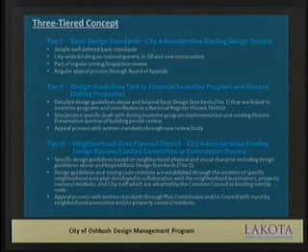And then we had the third tier, which was sort of a neighborhood area plan district. Like most of you are familiar with what a planned development is, it would fit right over a certain area, and then you would have those design standards just for that area. On an area-by-area basis, Plan Commission and Council would be the review bodies for that.

So what we're coming with today is basically Tier 2 has been removed from the proposal, and we're doing a universal design standard, and it's not called Tier 1 or Tier 3 - I just put them on there because I took off the middle one. So it has the simple, well-defined basic standards. It's citywide for single and two-family homes. It'd be adopted as part of the zoning ordinance, just built right in, administered through regular process and appeal process through the Board of Appeals.

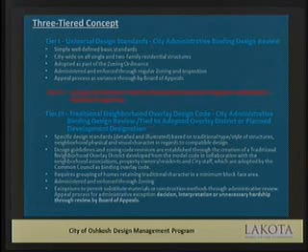And the second tier, the other one would be a neighborhood overlay, traditional neighborhood overlay design code. That would have the specific design standards, illustrated and detailed, based on the style or type of structures, the physical and visual character of the neighborhood. The design guidelines and the code revisions would be established through the creation of an overlay district, so you'd put it over the top of the regular zoning.

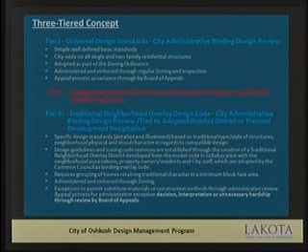Alternatively, you could do a planned development and kind of augment this model overlay code that we're going to go through. But it would require a grouping of homes that retain traditional character at a minimum of a block face, intersecting street to intersecting street. So you're trying to keep that character of the block. It's pointless to have the overlay over 1 or 2 properties where the rest of them don't have it, because you're not maintaining that rhythm of the street, of the neighborhood.

It'd be administered and enforced through zoning. Exceptions for materials and some construction methods would go through an administrative review. Any challenges to that, you'd go through the Board of Appeals. So I'm going to get into the universal design standards, and then Nick is going to go over the overlay, traditional overlay, neighborhood overlay design standards.

So again, these are going to be universal. They're going to apply to all single and two-family homes, and that doesn't matter if you have 4 people renting 1 room in each thing. If it was designed as a single or a two-family home, it would apply. Again, these are very basic, very simple, but it's going to deal with existing buildings, windows and doors, decks and patios, any additions or major changes, and major changes are defined as a 50% change to a facade.

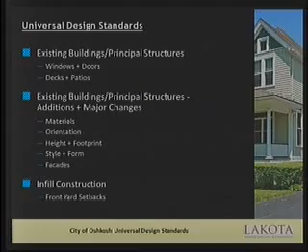An addition is obviously any bigger footprint or elevation change. We'll talk about materials, orientation, the height and footprint, style and form, facades, and then basically the front yard setbacks for infill construction - so when you have an empty lot in an already established neighborhood where you can set that home.

So windows and doors - basically there's three items in the overlay. Windows and doors that are fronting or visible from a street could not be removed by closure or filling.

Just some of the pictures I threw on here. Here's a long-term filled door - it's permanent, so they just basically filled this door off. You can see the shrubbery growing up above it. Not real nice. The rest of the building doesn't necessarily look too bad, could use some paint. Here you can see a lot of closure of windows. This one as well, there's a lot of closure of windows.

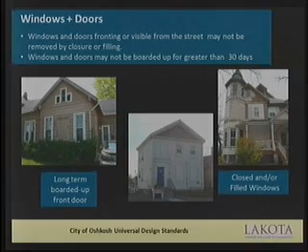You probably heard a lot of things saying, well, is that a maintenance issue? It is not - this meets building code. I mean, they're legally closed off, they're sided, but the character of this house no longer exists. So universally, we're recommending not to allow the windows to be closed off or the doors to be closed off permanently. Obviously, you could board them up for security or weather protection for a short period of time while doing rehab or repairs.

And decks and patios are now going to be limited to a rear or side facade of a building. If you're a double-fronted lot, a through lot, at that point you don't have a rear of the building, so there are exceptions built in for that. But you can kind of see what decks look like on the front of buildings.

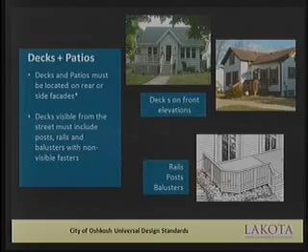And then also decks that are visible from the street, even if they're on the sides, would have to include posts, rails, balusters, and the fasteners being non-visible - trying to give a little bit higher quality to a deck on a home.

If you're doing a major change or an addition to the building, the material and color would have to be complementary and tie into the original building. There's just some examples here.

All the color matches, but you can see it's materials that are drastically different. This building has about 6 different building materials on it. Colors may not be super far off, but the materials themselves, if you were out there in person, it looks much worse than the visual image.

This structure looks pretty nice, but the addition itself is vastly different color, different materials. And when you walk down the street and see it, it just does not look like one building - it looks like 2 of them that got pushed together.

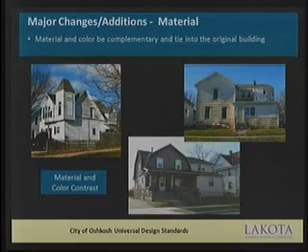For orientation, footprint, and height, basically we're saying that additions should be placed on the rear or side of the building, not on the front of a single or two-family home, with the exception that if it's architecturally compatible, and you can prove that, show it in your plans, you could build it onto the front. Also, that addition shouldn't be 50% bigger than the existing building footprint. You shouldn't over or dominate the existing home with your addition.

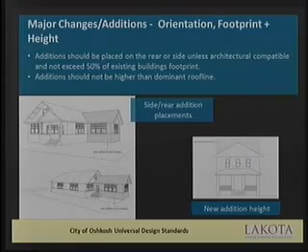And then additions should not be higher than the dominant roof line, and you can kind of see what a dominant roof line would be. These images just basically show an addition on the rear or the side. If you can imagine it on the front, it doesn't look that great.

Talking about facades, basically any facade facing a street, we're now saying that it must have at least 25% area devoted to windows and door openings. What we get a lot of, and it's kind of hard to see, basically like this wall plane here, they just closed it off. Sometimes they'll close it off for a number of reasons - they don't want to pay for windows, they're changing the interior in some way, but that's not a very good look for a street facade.

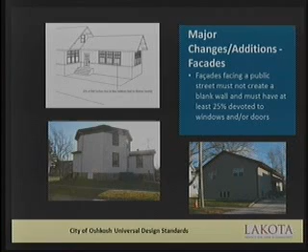This one, again, is hard to see. This image - Nick is going to go into it a little bit more detail with the overlay - this area here is about a 25% fenestration in that wall with windows.

And then the last one was just infill construction, which was the front setback, and it's basically lining up the structure onto the street. This one's not that great of an example, but you can see most of the homes are pulled back - this one's probably about 20 feet back from the rest of the homes in the block. So as you're going down, all of a sudden you see a big void, and if it happens too much, you end up with what I call like a sawtooth street face.

This is even a different example because it has the garage out in front, so the additional garage was out front. But that's the basis and the basics for universal standard. Once again, it applies universally for all homes, single and two families in the city.

So we didn't get into a lot of detail on any kind of traditional style. If you're a Queen Anne, you have a distinct style of a home that is probably not going to apply to a 60s ranch or 70s ranch.

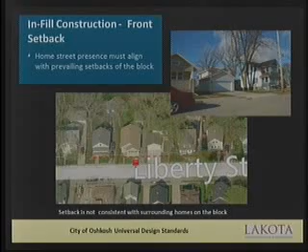So these were very, very basic, designed to stop some of the worst things that we've seen happening. And David hit some of the basic concepts, but in your handout, we get into more specific ordinance provisions for both the universal and the overlay. So yep, David's going over a longer ordinance in a brief time. For the sake of time, it is very abridged, but trying to hit the highlights of what's on there.

And with that, I'm going to turn it over to Nick to go over the overlay code.

This is forward, this is back. This is the plan. There's a trigger on the bottom. And also, I wanted to mention that if you want to make any comments or anything, raise your hand, let me know. We have to take the mic around because of the style of the room. It is televised, so there you go.

Thanks, David. My name's Nick Kalogeresis. I'm with the Lakota Group. I'm the person with the long last Irish name. Thanks for having me back here again.

As David said, I'll be going over the overlay code. You have a copy of that. My presentation is really going to give an overview of the code. I'm not going to get into every sentence of the code, but give you the highlights and explain why we came up with some of the provisions as we did.

First, we wanted to at least explain what the overall objectives are, and I think we discussed these almost a year ago today. Obviously, the main point of this overlay code is to promote better design character of our neighborhoods and to maintain that character and to guide good design. So that's an important part.

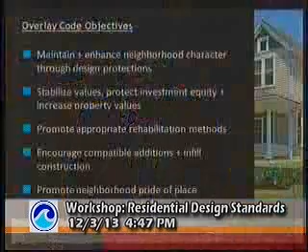The other aspect is obviously protecting property values, protecting equity that's already there for people who have already invested in their properties, and to stabilize and increase property values in places that may adopt this overlay code.

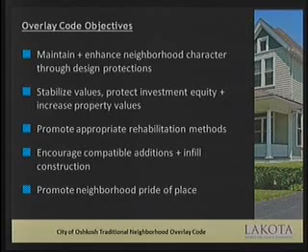The other thing that we want to promote is good rehabilitation methods. So some of the things that we explain in the code are really good, proper—I wouldn't say preservation techniques, but good rehabilitation techniques for traditional neighborhoods. And we want to encourage good infill design as much as we can and good additions, and obviously promote pride of place in neighborhoods that may adopt this code.

Oops, I pressed the wrong button. Let's see. There we go. All right.

The code, I know it's a little long, but basically we address three major parts. One is existing buildings, and we're really focusing on just a few things, mainly windows and doors and porches, obviously being a major element of traditional homes. So that's an important thing. We're also addressing patios and terraces and things like that. But when it comes to existing buildings, that's really all we're focusing on.

Additions and major changes—we're really focusing on where it's placed, its orientation, materials, fenestration, windows, things like that, a little bit of style. And with infill construction, we're focused on very much the same thing, although we've added driveways and ramps to that as well for new construction.

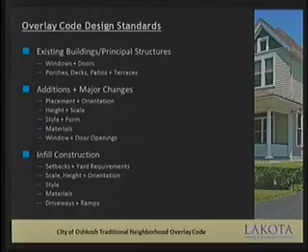So, overlay common elements. Ooh, what happened? Oh, there it is. Okay. As we go through this, the basic elements of the code are these that we have above here.

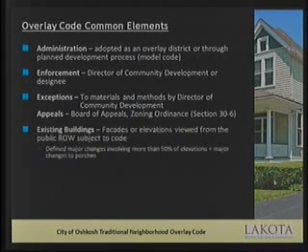One is, administratively, it can be adopted, as David said, as an overlay to an existing neighborhood on top of the existing zoning. Or secondly, alternatively, it could be adopted as part of a planned development process, and the code would serve as a model code, and you could actually add to that or modify it if we go through that process. There's two basic ways to administer it.

Enforcement obviously would be the Director of Community Development or the designee, so it would be in the Planning Department where it would be enforced. There are exceptions that could be made to this code for an applicant who wants to use a certain material, and that material is appropriate to the style of the house—an exception can be made for those instances.

And if there's an applicant who is not happy with an administrative decision, they can appeal that to the Board of Appeals. So we do have that appeal process in place for this code.

Now, the three major things here: for existing buildings, we're only looking at things viewable from the right-of-way. That's mainly the front facade, and parts of the side elevation that are also viewed from the sidewalk. So that's all we're looking at.

This code only kicks in if a project comes forward that's going to change more than 50% of the front facade or the side elevations. That's when the code kicks in. So the question for all of you is, is that acceptable?

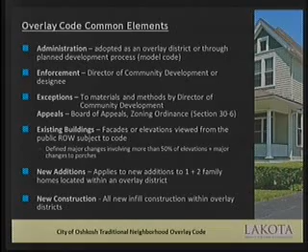I'm not going to talk too long about materials, but throughout the whole code, as you've probably read, we really stress maintaining existing materials—try to preserve them, maintain them, repair existing materials as much as possible. Throughout the overlay code, you're going to read that as a primary emphasis.

But if original materials can't be maintained, then replacement is allowed. We allow a whole range of alternative materials, both natural and synthetic, to be used in the overlay district.

Pressure-treated woods requiring painting, staining, and wrapping are also included. A major emphasis on replacement is that if you're going to replace materials such as a casing around the window, it should match the width of the original material, or the profiling and detailing, as much as possible.

New materials should be appropriate to a certain design style if it's new construction. So if it's a Queen Anne house, usually a sided house, a new infill house would be a neo Queen Anne and should have siding as its primary material. Materials should also match color as appropriate to the house, and materials can be removed temporarily to undertake a rehabilitation project.

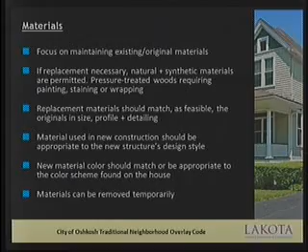That's really the whole emphasis about materials throughout the overlay code. Question? Yes, I don't know if...

This is appropriate, but when you're looking at materials, have we considered doing anything with lead and asbestos abatement if a project is commenced? Would this be the appropriate time to put that in? That's a good question—I don't know if you have a suggestion on that.

You're really looking at the overlay here, so if we would be doing something, I think we'd want to look at that as a universal standard versus just an overlay, because why would we apply that environmental standard just to a select group of homes when it may be a citywide concern? So I think we have to look at it differently than just part of the overlay.

I wouldn't challenge that, but I'd like to say that a lot of this is looking at stabilizing and improving older areas of the community that would be most affected, and I'd at least like it considered to put that standard in—something to the effect that any alterations or any construction, regardless of the percentage, part of the program is lead and asbestos abatement, for any project. That's correct.

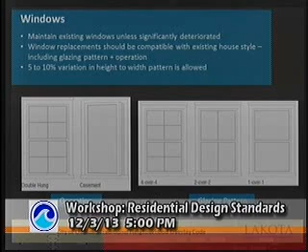Under existing buildings, we're looking at windows, doors, and porches primarily. For windows, we're trying to encourage rehabilitation of the existing windows as much as possible, placing storm windows when more feasible. Only if a window is significantly deteriorated, with rot or missing pieces, would window replacement be considered. One of the things we're primarily looking at is making sure the window operates the same way - so if there's a double hung window that needs replacing, it needs to be a double hung window in kind, maintaining the same glazing pattern, like 4/4 or 2/2.

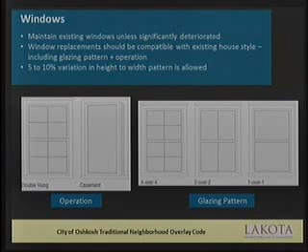If there needs to be a change for window replacements, we are allowing a 5 to 10% variation from the height to width pattern. So we're allowing a little bit of change - if somebody wants to replace a set of windows and wants a wider or smaller window opening, we can allow that variation.

In terms of window casings, for many traditional homes, this is an important feature, especially around windows. A lot of Queen Anne's have trim work around the perimeter of the house as band boards. So they're very character-defining features.

Under this code, we are encouraging property owners to maintain the original casing, repair them as much as possible, repaint and reinstall them. But if they're severely deteriorated or missing, replace them in kind with similar or synthetic materials as much as possible, maintaining the width of the original materials.

This is an existing window with original trim. This is a window that's actually been replaced, with replacement trim around it. You can find replacement parts fairly easily, so we want to maintain that feature. Trim also has a good functional characteristic in protecting windows from being infiltrated by water.

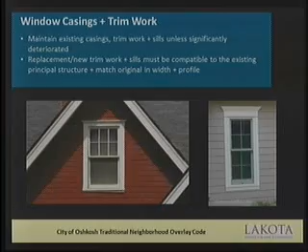Windows and doors, as mentioned earlier under the universal code, the same applies in the overlay code: original door openings should not be replaced or enclosed, they need to be maintained. We are allowing that if a property owner wants to install a secondary entrance viewable from the public right-of-way, they can install it off to the side, especially if they're going to use the back part of a porch as an entrance. We are also allowing temporary door closures if there's building remodeling or a project happening, so it can be temporarily enclosed.

And again, same with everything, we are maintaining. Part of the code says you can't remove existing windows, you have to replace them the way they are.

Well, many of these houses weren't built with conservation in mind. I'm wondering what would be the problem if that top window was a window to the attic, and the middle windows on the side—in order to make this a more efficient house, he took out the middle window and ran the siding with the same material. What would be wrong with that? I'm looking at, you want people to revitalize the houses, and part of revitalizing is also to make it more insulated, better equipped to lower energy costs. So I'm not sure why we wouldn't allow some of those things to happen, or can they do that through the appeal process?

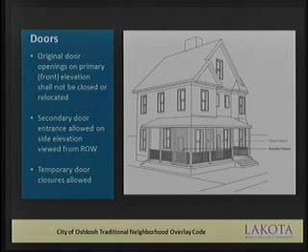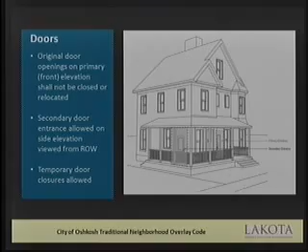We are forbidding it. To answer your question, the issue with removing windows from the facades of the house—this applies to the front facades and facades visible from the street, so we don't hit the back or rear of the building. It's really trying to keep that neighborhood character. Once you start changing the distinctive features on your pre-50s homes—there's 20 different styles, Queen Anne's, bungalows, craftsman's, four squares, tons of them. Their big defining features are their windows, door openings, and porches.

When you start closing them off for whatever purpose—efficiency, not wanting a window in that room, or a dog that's too tall and jumps on the window—when you start changing those over time, that house loses its traditional character. Again, this is only for traditional neighborhood overlay areas. And that's the best way I can answer your question, is that as you start doing those things, you do start removing the character of the building.

And a good example with that is, you just not putting the trim on and putting in solid windows that don't open. The house isn't going to look the same. Now, for the goal of energy efficiency, it might be in there.

Windows themselves, even these old windows—in my opinion, especially these old windows—can be rehabbed and be very, very solid. You just have to actually do the work. The other thing, too, with some of these houses, is that the modern practice of air-tighting everything in old houses is going to be a mold issue. The houses are supposed to breathe.

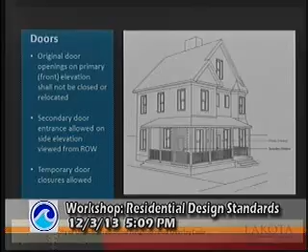With these overlay standards will be an appendix - a design guideline book of housing styles pre-1950. You go pre-1940s, some are built in the 50s but not as many. They're actual styles of houses. When you get pre-1920 they become more vernacular, but they're still styled houses - they have character to them, they have elements that are features of those homes, and those things will be reviewed when we look at that. So if the window had been changed out at one point and you're going back to do a major facade change, you would go back to the traditional house style, not to what has happened over time. This is a code trying to preserve the traditional character of the home and the neighborhood - that's what it's for, to keep that traditional character of the neighborhood.

Any other questions? So we're going to keep going - I'm sure you'll have more.

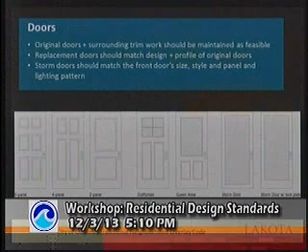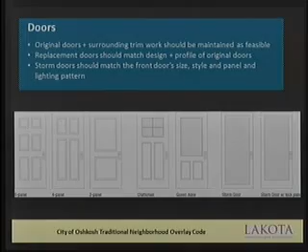In terms of doors, what we have here and what you've seen in the code are just typical doors for traditional homes - doors with a mixture of raised paneling and glazing, which is what we're trying to encourage. So typical panel doors: 4-panel, 6-panel, and combination. And here are our storm doors - one thing we want to encourage is storm doors that are fully glazed, so you can see the original door through the storm door. That's something we want to encourage, also storm doors with kick plates in them. These are just some of the samples we want to try to encourage.

Porches are one of the major things we're looking at in the code. We're stressing preserving as much of the original material as possible, from major elements like foundation piers to the steps, to the skirting, to the roof and columns. If some things need to be replaced, they can be replaced in kind with both natural and synthetic materials, complementary to the house's original design.

So for a Queen Anne house, we definitely would like to see a Queen Anne porch. This code would only apply to those applicants seeking to replace their porch or undertake any major changes to it. So we want to try to be compatible with the existing house.

Treated lumber can be used as a material as long as it's either wrapped or painted. That's one of the things we're trying to encourage.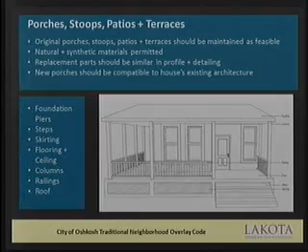One of the things we want to address is porch enclosures. That was a major issue that came up through this process. We want to encourage people to maintain the original porch as much as possible, to maintain 100% transparency. Originally, all porches were open. Sometimes during the 1920s and 30s, they began to be enclosed, but often with fully transparent windows. So we're trying to avoid things like this from happening in the neighborhood.

We are allowing some enclosure to take place, and the major thing is we're allowing up to 40% enclosure in the neighborhood. So this is about 60% right here. What we're trying to avoid is something like this, where we lose a lot of the porch—this is like 30%. We want to maintain some transparency of the porch and the overall neighborhood's porch appearance.

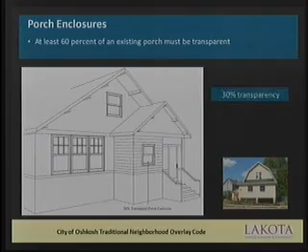All right, let's keep going. Oops, went too fast here.

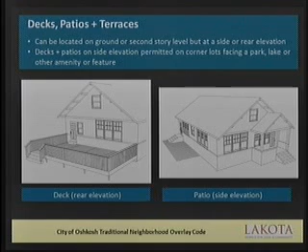This is pretty straightforward: decks and patios being placed on the side or the rear elevation. We should try to encourage new decks to at least fit in with the existing house, with railings appropriate to the existing style.

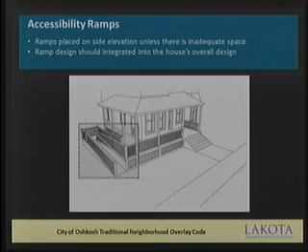In terms of additions and major changes, we want to address where the addition happens and how it looks on the overall house—its height and scale, overall materials, windows and door openings. Additions should be compatible with the existing style of the house.

Additions, especially on the rear or side of the house, should not be higher than the ridge line of the existing house. We're trying to make sure the addition fits with the scale of the existing house and doesn't overpower it—it should remain behind that dominant ridge line. That's one of the major features.

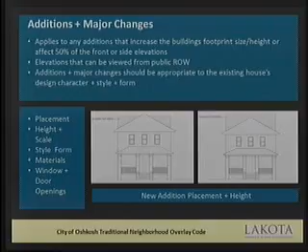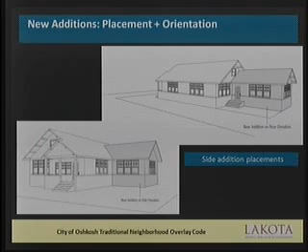As already shown, in terms of placement, additions should take place in the rear of the house, whether behind the house or on the side. That's where we'd like to see additions take place overall.

The overlay code also requires that at least 25% of an addition facing a right-of-way must be transparent or glazed. That's what we're looking at to try to avoid certain appearances from the street. Windows should generally follow a height-to-width ratio of 2 to 1 or 2 to 3.

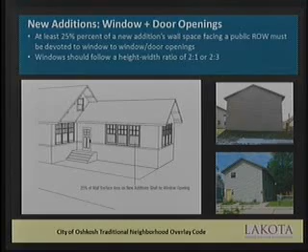We're also looking at managing dormers. The basic requirement is that the dormer should be compatible with the overall style of the house. Ideally, new dormers should be placed on a side or rear elevation, but we can allow them on the front if the dormer fits with the style of the overall house.

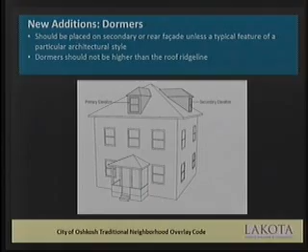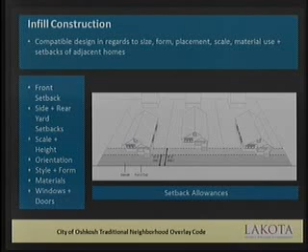In terms of infill construction and placement of the new house, what's a little bit different in this overlay code is we're allowing a setback allowance, especially for smaller lots, if the property owner wants more front yard space. The new house needs to meet all current zoning requirements, but we allow some flexibility where the maximum setback could be 30 feet, whereas the current setback is 15. So we're allowing leeway in traditional neighborhoods because sometimes we're faced with smaller lots.

In terms of new construction fitting in with the overall character of a neighborhood, the height of the new house should not be more than one story higher than surrounding or adjacent buildings. So if you're going to build a new house, it can be maybe 3 stories in this block in particular. That's the overall building envelope, meant to manage the overall scale of a new house within an existing neighborhood.

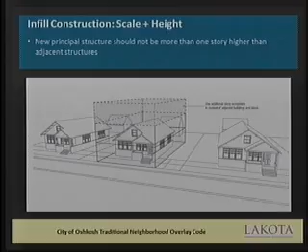Another thing we addressed in the code is garages. If a property owner wants to develop a new garage, the preference is for it to go in the rear portion of the lot, serviced by a driveway. But if the property owner doesn't want to do that, we allow attached garages. The major feature is that the garage must be set back from the front wall plane at least 5 feet, and it should be compatible with the existing style of the house. You can see this garage does that—it's set back and fits in within the house.

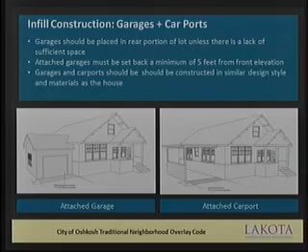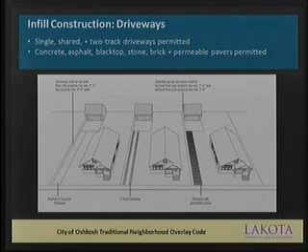We also allow carports, which must likewise be set back 5 feet from the plane of the house. Last but not least, driveways. We're trying to give property owners in traditional neighborhoods some choices, allowing a traditional asphalt or concrete driveway serving the garage, a two-track driveway, or driveways paved in stone or permeable pavers. If somebody wants to install permeable pavers, they can do that as well. So we're allowing that type of flexibility in the code.

Thank you, this is very helpful. Can we assume that when the references here to materials, you're talking head to toe, including roofing?

We don't address roofing in the code at all. I'll give an example: at that other zoning meeting, the consultant showed a slide of a nice $300,000 home completely covered with solar panels—some may find that attractive, but I thought in terms of neighborhood blending in, it looked not good. I don't know how you'd consider that a material, but it's just not referenced specifically in here, so I don't know how you deal with roofs.

I don't think we have the ability under state statutes to prohibit placement of panels. I think that might be worth looking into, because a lot of other communities regulate solar panels so they must be placed on the rear portion of the house, or on the garage, or on the ground. Those are some options, but if there are specific constraints here in Wisconsin, we'd have to address that.

I want to point out that when we did these standards, we did what I'll call a stop-the-bleeding universal standard—stop closing up your windows, stop putting decks on the front of your house. For the traditional ones, they got much more detailed, but it's very difficult to do something that fits every house, since each house has very drastic and different styles. We didn't get into things that would be regular building code or alternative energy scenarios or placement of antennas—some of those are exempt from your code regulations, so you're not going to see that.

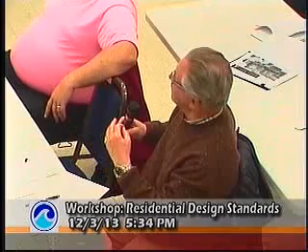Yep, once again, are any of these projects, what is the trigger to begin with a staff review? Could somebody go in and replace one, two, three windows without any review? Is it that you require a building permit?

Do any? But could I go in and put my own window in without having a building permit? Most communities, yeah, you need a building permit. Is it being done? Could you do it, David? Yes, you probably could do it, but is it legal to do it? No.

So that triggers the review. When the building permit comes into our office, if it's in the universal or if it's in the neighborhood overlay, it'll generate on the computer software and they'll check it. So obviously, if they do any of the work without the permits, that's problematic. It's problematic with a lot of things.

I guess I'd like to have you take into consideration, because one of the things that was paramount through here was windows and doors seemed to be a big issue. You can be replacing the front door, to Dave's point earlier, because it needed to be replaced, and basically replace it with anything that's not in the character of the neighborhood, and this would never get triggered. You could do that with one or two windows and this would never get triggered. And so you can likely do whatever you want.